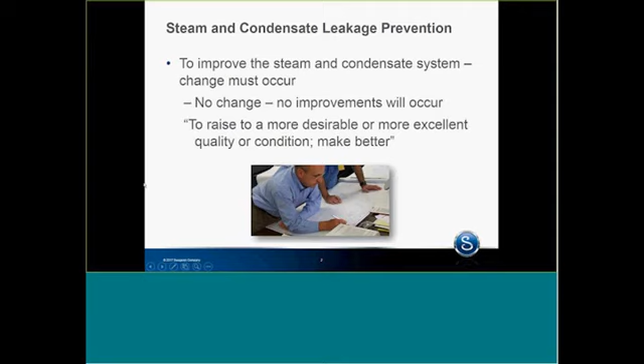I give people an example: I have an iPhone 5 and I'm going to upgrade to an iPhone 6. So in my daily life, I change to improve what I can do as a support engineer to the world. The same thing applies in plant operation - we need to change. If there's no changes going to be done, then there's no improvements that will occur.

Steam and condensate leakage has a negative effect on the steam system in plant operation. With steam leaks, you lose both the sensible and latent energy. The thing about steam leaks is they grow in size - the steam will erode the opening and grow, what we call wire draw. We have to be very proactive, because if we let the leaks go, they will start to increase in size and more leakage will occur.

The increase in leakage size permanently damages the components. I go in and work on flanges, and they have steam leaking on them - it erodes the flanges to the point that I have to really take the flanges out and put new flanges in. So steam leakage permanently damages the components we're working with.

Steam leaks also increase emissions. If I go by and see a steam leak to the atmosphere, yeah it's energy, yeah it's safety, but it's also emissions. Because if that steam is leaking to atmosphere, it does nothing for me in the process. If it's leaking out there, I have to put more fuel into the boiler to overcome the leaks, and more fuel in the boiler increases the emissions from the boiler. So we can do calculations based on the EPA that give us how many pounds of CO2 a steam leak will cost us, how many pounds of SO2 a steam leak will cost us.

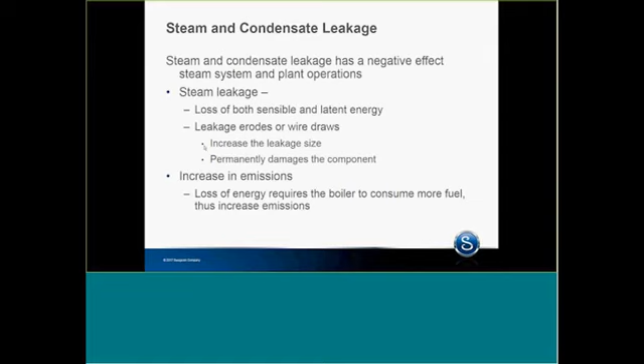So it's not only energy, safety, reliability, but also think about emissions. I've done steam leak corrections for plants that are in containment areas - containment means they have to reduce emissions because they're surrounded by a city, residential areas, and they want to reduce the emissions. The total basis of the steam leak correction was reducing emissions.

Steam leaks are one of the top 5 greatest paybacks. People always ask me, I want to optimize my steam system - one of your top 5 is steam leaks. One thing is that when you fix it, it's instantaneous savings. The correction or improvement in the steam system has a greater payback.

Everyone talks about correcting steam traps, and yes you should correct your steam traps, but a high-pressure steam trap at 400 psi is probably failing into a flash recovery system, and you really don't lose any energy - you lose the mechanical work of it. A steam leak, you lose both the sensible and the latent energy. So it's one of the top 5, a very important part of our optimization.

The other thing is most leaks can be corrected without capital expenditure. That means I'm not going in and putting in improvements on the boiler, like a new economizer, which is a capital expenditure. Steam leaks typically don't require capital expenditure, which makes it a very viable part of our optimization of our steam and condensate system.

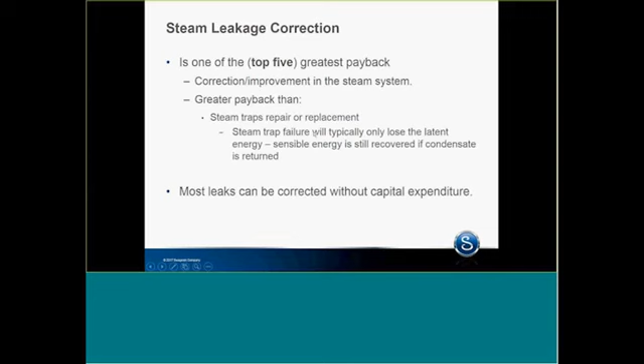Steam and condensate has a negative reliability. Failures with valves, failures with connections, failures with flanges. All this will cause production issues.

I'll give you one example, especially leakage on steam tracing systems. In steam tracing, we require 100 psi at 338 degrees. If there's leakage, we're not going to get 100 psi. We're going to get some pressure less. Any pressure less will have a lower temperature, so therefore causes production issues.

The other thing is that we have failures out of the flanges. We've got to shut down parts or segments of the plant to correct the leakage. Now I've got to schedule a shutdown of that plant to correct this leak area.

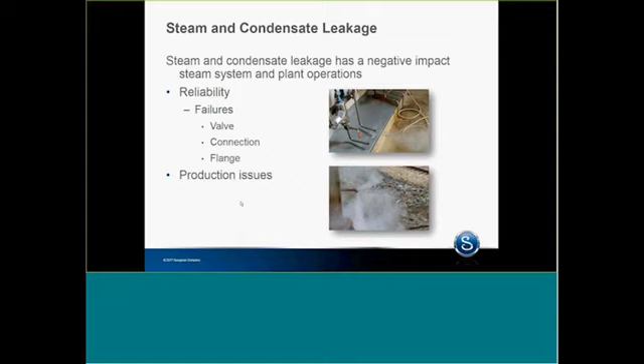Safety. One of the things is safety. Leakage is a hazard. The steam is hot, can burn. Visibility - I've been in plants where you can't walk through the tunnel area because there's so many steam leaks you cannot see. I've been in different plants where they have sections of the plant taped off that you can't enter because of too many steam leaks. It fogs up your safety glasses and you can't see.

Steam has a high temperature. Coming out to the atmosphere is 212 degrees, and it can cause burns. Condensate leaks - walk in a facility and they have condensate leaks, and the condensate's pouring down onto the ground level or the first floor or whatever floor level, and the condensate is coming out at 212 degrees.

OSHA says anything over 140 degrees or higher, we have to protect plant personnel from burn hazards, which is really good. So one of the things we have to do is correct steam leakage to protect plant personnel from the elevated temperatures. OSHA says 140 degrees or higher - we need to protect the plant personnel.

We want to correct the steam leaks. We do not want to rope off the area so people can't walk in there. We want to fix the correct leaks. Just remember, the standard is 140 degrees set by OSHA, that we have to protect plant personnel.

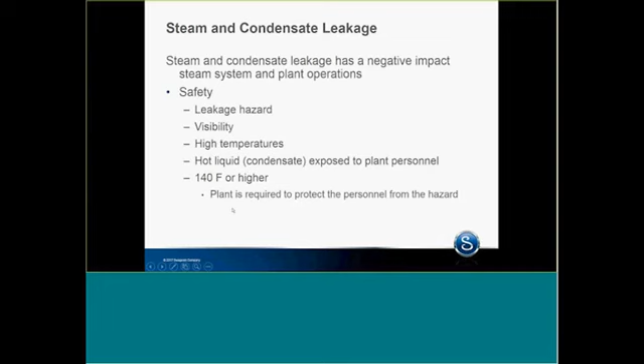What are the major causes? I write papers about steam leakage and do analysis and everything else. Connections, threaded and tube fitting - I'll be talking about each one of these areas. Valves, internal leakage and external leakage. Corrosion, waterhammer, flanges, piping - that's where we get most of the steam leaks from these areas.

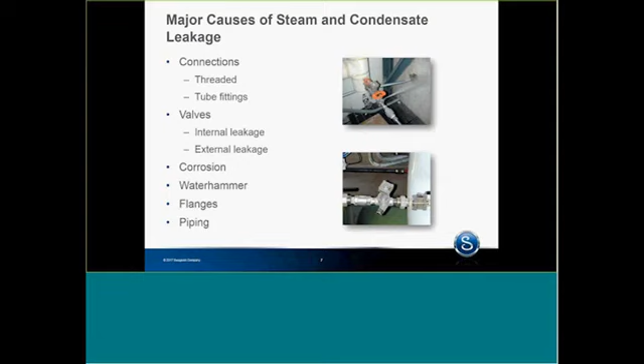Example - connections, threaded pipe. Every time I do a steam leakage assessment, number one cause is threaded connections. Bar none, threaded connections. People always ask me, how do I get around having steam leaks? Don't thread pipe, period. If you get into the thread associations and the technology and everything else, we're relying on the thread itself to do the sealant. And yes, I've been through the Teflon tape and the blue sealant.

It's not a sealant, it's a lubricant. The thread ends up being the sealing point. The other thing is that when you have a steam system, people have a tendency to forget it's going to expand and you're going to have contraction - expansion and contraction. So you're asking the threads to do the sealing, and you're asking the threads to take up the expansion and contraction.

The next thing in the steam and condensate system, you have CO2 corrosion and oxygen corrosion. CO2 corrosion attacks the weakest part of the pipe, that is the thread. Oxygen corrosion can attack the pipe, and it can also attack the threaded connection.

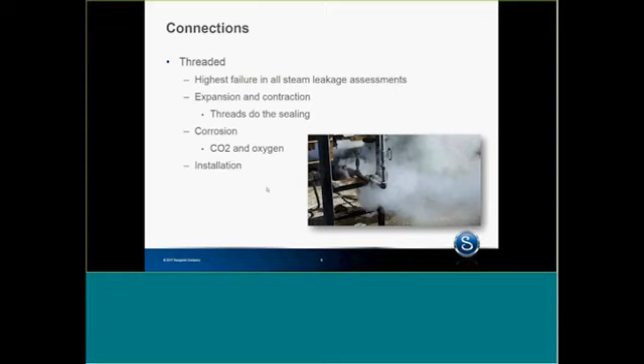Welding, 15 PSI or higher - you have to have a certified welder to B31.1, which is the National Power Piping Code. In all my years of construction, and I'm continuously doing installations in the field, welds do not leak. If the welder is certified, I've never had a weld leak yet. I'm not done yet with my career, but I have not had a weld leak.

The other thing is that besides welding, we use tube fittings. Use of tube and tube fittings, we've been doing that for 35, 40 years. Tube fittings today are guaranteed not to leak. But the thing is, going on plants, there are tube fittings that are leaking, and that's because they're improperly installed - people have not been trained correctly how to install the tube fitting. But if you install the tube fitting correctly, no problem. I'm doing a project right now where the pressure is at 400 PSI.

And the plant says, well, can you use tubing and tube fitting at that pressure? Well, yeah, we use tube and tube fitting at 3,200 PSI. 400 PSI is not that very high of a pressure.

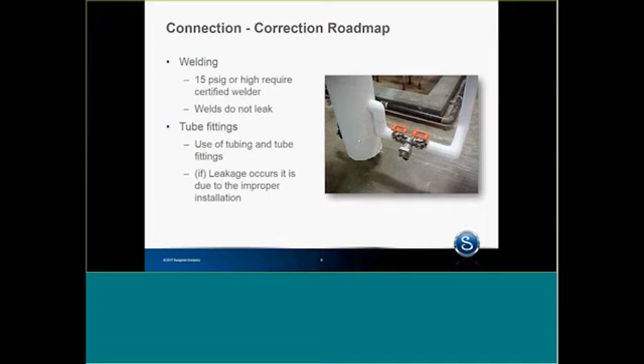So when you're looking at installations, as you can see in this picture, this is a typical installation we use, using tubing and tube fittings for installing a simple device like a steam trap station. That's been in operation for 4 years now with no leaks. So, anyway, just another way to get around using threaded connections.

Flanges. People say flanges leak. No, people make flanges leak. Today, you need the proper material selection for the gasket. You need to know the proper torque specification. Today, gaskets are torqued. Don't go up there with a wrench, put it on the bolt, hit it with a maul 3 times and think that is torque. That's not torque. The other thing is you have to know the torque pattern, which comes from the gasket supplier.

The next thing, you have to only have axial movement on the pipe. If we think we're going to have anything but axial movement, we will guide the pipe, not support the pipe, guide the pipe. A guide can support the pipe, but support cannot guide the pipe. So people need to understand the difference between a guide and a support.

If you do that, then, as you see in this picture, this piping system with flange valves has been in there 25 years, okay? Never really been touched because they used the proper gasket material, they used the proper torque specifications and the torque pattern. And they made sure this system here will only have axial movement on the flanges, thus no leakage. Just remember, flanges do not leak today.

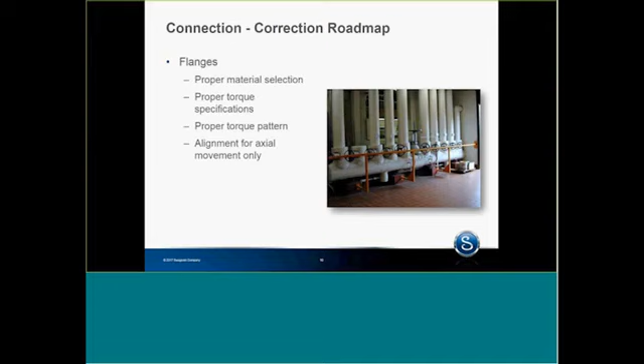Then we get talking about valves, internal leakage. And valves out there in the system, we use them as blow-off valves on steam lines, condensate headers, isolation, drain valves, a multitude of different applications. And we get internal leakage. As you can see in this picture, this valve is in the closed position, and it's been leaking, and the wire draw just totally destroyed the internals.

The other thing we have a problem with on valves is external leakage, which is the packing, which comes up probably after threaded connections as the second major contributor to steam leakage. And then we have bonnet leaks. Not too often, but we do have them.

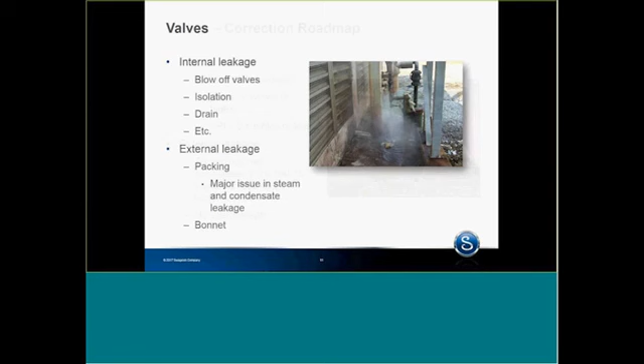The thing about internal leakage is you have to understand FCI and API standards. Any valve you put into the steam system today, FCI standard must be Class 4 or higher. The highest classification is 6. If you want to buy Class 6 valves, great. That's very, very, very low leak rates.

The API standard is 3 bubbles or less, which means putting 80 psi on one side of the cavity in the vertical position and filling the other cavity with water and counting the bubbles per minute. API says no more than 3 bubbles per minute. A lot of vendors will say my valve is bubble tight, meaning no bubbles in a minute. But you need to understand these classifications.

If you're going out, and not so much on the control valves, as you can see in this picture, the green is the control valve, but it's the isolation valves before and after it. If you don't specify the class shut-off, you get Class 1, which is what we call a commodity valve. It leaks like a river. And you get what the picture showed on the previous slide, a tremendous amount of leakage.

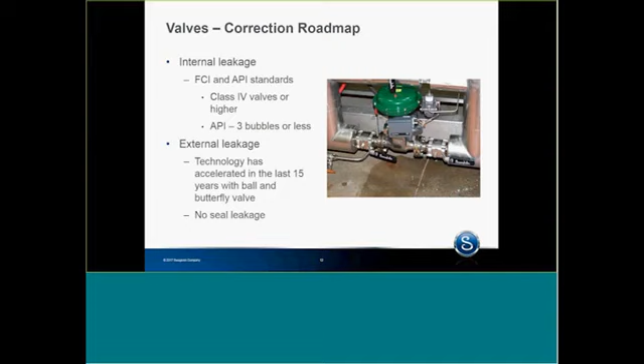And that causes major issues. Other valve types, specifically ball or butterfly, technology has accelerated in the last 15 years. For one reason, we use them for all types of gases, including gases where we cannot have external leakage. So why not use the same technology in steam or condensate so we do not get external leakage? But anyway, look at changes in valves.

Corrosion. The thing is that in condensate systems, most of the corrosion is due to CO2 corrosion, carbonic acid. In the boiler plant, we treat it with amines, either filming or neutralizing amine, to counter the carbonic acid. The issue with leaking condensate lines is when you allow the condensate to cool down to roughly 204 degrees, the CO2 corrosion gets very aggressive and can eat through Schedule 40 piping very fast. The standard for condensate return lines should be stainless steel, but people don't do that. They're worried about the cost.

But just remember, 16% of your energy sits in the condensate. Why let it go to the ground? So to counter CO2 corrosion, keep the condensate temperature as high as possible. If you can get the condensate temperature to 250 degrees, or what we call a pressurized return system, you reduce the amount of CO2 corrosion that's going to occur. If you're going to put condensate lines in, do not use Schedule 40 piping, use Schedule 80 piping, which will last a little bit longer.

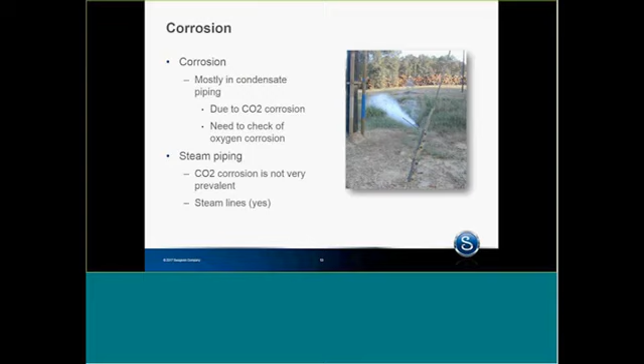Steam piping: CO2 corrosion is not very prevalent. Very, very, very seldom do I find CO2 corrosion in steam piping. The steam piping has high temperatures where CO2 corrosion is not prevalent, but in steam lines we'll have oxygen corrosion. So in the steam lines you should be checking your deaerator for performance in removing non-condensable gases, one being free oxygen from the feed water and makeup water. The standard in the industry, or ASME standard, is 7 parts per billion oxygen or lower.

So just to go a little bit on the correction roadmap: if you can inject amines into the steam system, get with your chemical supplier and see what's available for countering CO2 corrosion. For condensate lines, I really would prefer you use stainless steel, but that's your preference. If you don't, use Schedule 80 piping. Do not use Schedule 40.

Steam piping: as I was saying, the deaerator should be tested twice a year for dissolved oxygen. There's an ASME standard for doing that test, which means you remove the sulfite from the deaerator operation and do the test, and your level should be 7 parts per billion or less. Now, same thing, you should go out in your steam system and check for dissolved oxygen out there. Out in the steam system, we do not want more than 80 parts per billion.

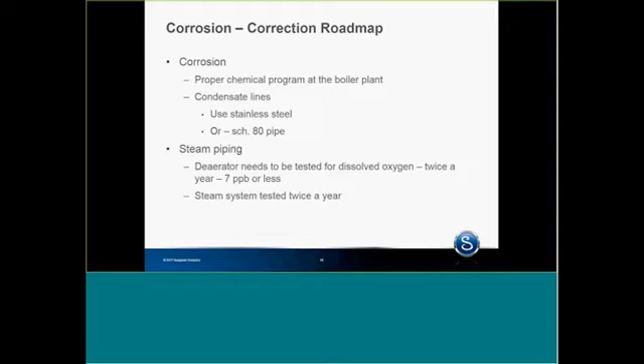And people ask me, the deaerator's in operation, how do we get air into the system? Startup procedures. People do not vent air from the steam lines at startup, and they do not vent air very well from the process, so we get air entrainment. So those are some of the things you can do for your correction roadmap.

Waterhammer. There are 4 types of waterhammer: hydraulic flow, differential, thermal shock. I can talk for 3 days on waterhammer. Solution: no waterhammer. No steam system should have waterhammer. Zero. There's no reason for it. If you do have waterhammer, you hear that pinging, banging, just remember: it's telling you you've done something wrong. Come and fix me, otherwise it's going to do damage.

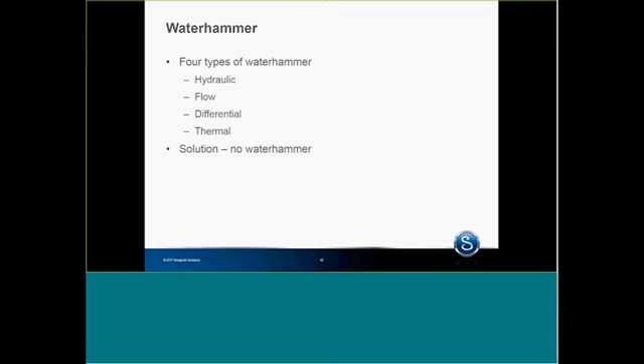The thing about waterhammer, it can take piping out, elbows out, crack valves. The list goes on. My only comment with waterhammer: if you hear it, go out and make corrections. You should not have waterhammer. It's a very, very serious safety issue. So, no waterhammer.

Erosion. A small leak today will be larger tomorrow. The steam will wire-draw and erode the materials, causing a leak. You get it around threaded connections, get a leak, and it just continues to grow and grow and grow. We do have processes where we cannot shut down. I used to be in charge of a power plant, and I only had 1 shutdown per year. With that shutdown schedule, if I had a steam leak, I had to wait 300 days till my next shutdown.

So it does cause issues. There are people in the field, in the industry, that will come in and fix steam leaks online. So if there is a steam leak and you cannot shut down, you might want to take a look at these people, and they'll come in and seal the leak. They will not fix the leak, they'll seal it online.

So anything on steam leakage, we really want to be proactive. And the proactive part is changes. What are we going to change to stop the leak from occurring again? That's where it's proactive.

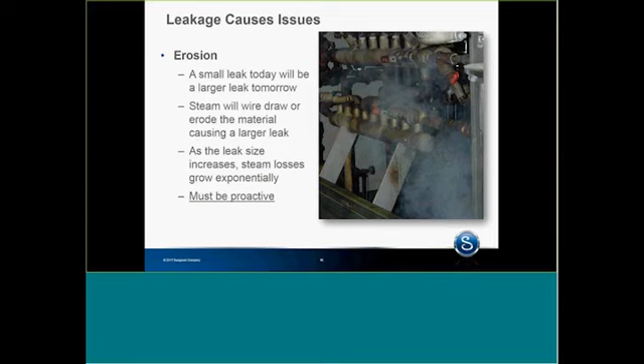Production leaks will create system pressure losses, which basically lower pressures and lower temperatures. On small applications, process applications, it becomes very, very problematic. Larger applications, not so much, but small applications, we get steam leaks. When you lose pressure, we lose temperature. The thing with steam is, if you have 100 psi, it's 330 degrees. If you don't have 100 psi, you're not going to get 330 degrees. So if you have steam leakage, you have lower pressures, and you're going to get lower temperatures. That's really why you want to be proactive.

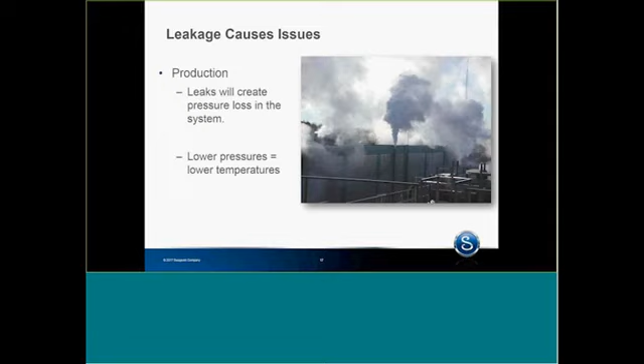Reliability. One of the things is the reliability of valve selections. For one thing, there's reliability, and you've got two things - you've got code. So either you're on ASME, the boiler code, or B31.1 or B31.3, you're under some code. The code says the valve has to be rated for the highest pressure and temperature, which is where the safety valve is set. The code doesn't tell me that the valve can be unreliable or reliable. So as a buyer of components, or designer of components, or operator of a system with components, you have to look at the valve and determine if it's going to be reliable or not.

We do have valves that we put in the steam system, and the vendor has a lifetime warranty on the valve - lifetime. And then we have valves that can go in the system to meet the code, and the warranty is over when you take it out of the box. There is no warranty, okay? It's going to leak like a river. Valves, we should be getting somewhere around 30 years of operation without any issues. Same thing with steam trap selections, leakage through the bonnet or the side of the steam trap - again, we have two things, code and reliability. Steam traps, minimum 15 years operation, anything below 300 psi.

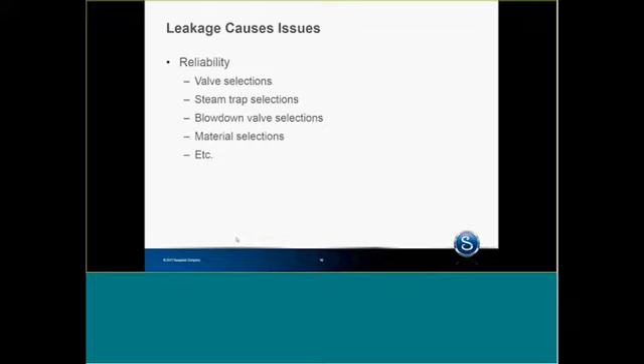Blowdown valves, same thing, material selections. My thing is material selections - I only use cast steel and stainless steel. I very, very seldom ever use cast iron valves in the steam system, for one thing because of code issues. So I'm always looking at cast steel or stainless steel in my valve selections to get the reliability that I want in the system.

Steam condenses to condensate, creating water in the air. In colder climates, believe me, it freezes and causes hazard, ice formation. I've been in plants where they can't go into one segment of the plant because all the leakage is just straight ice. So there's a multitude of reasons to correct steam leakage, and safety is one of them.

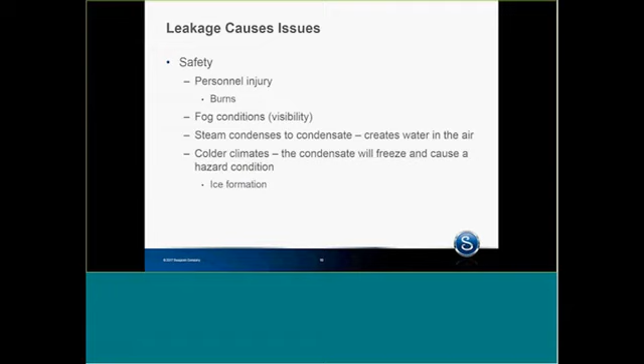Remember, OSHA says 140 degrees.

Part of your program, this is a vital point - just don't go out and fix the leaks and expect it not to leak again. You've got to do root cause analysis, and it has to be part of the management program. You have to understand failure, and once you understand failure, make changes to improve the system. Change has to occur from design, installation, selection of products, vendor selection. So don't just go out and fix leaks, because the leaks will come back again. Make changes.

Don't accept leakage as normal - it's abnormal. I've been in very, very large plants that have 4 steam leaks and think that is outrageous. I've been in plants that have 400 steam leaks and don't think anything about it. So make it normal not to have steam leaks, and abnormal to have them.